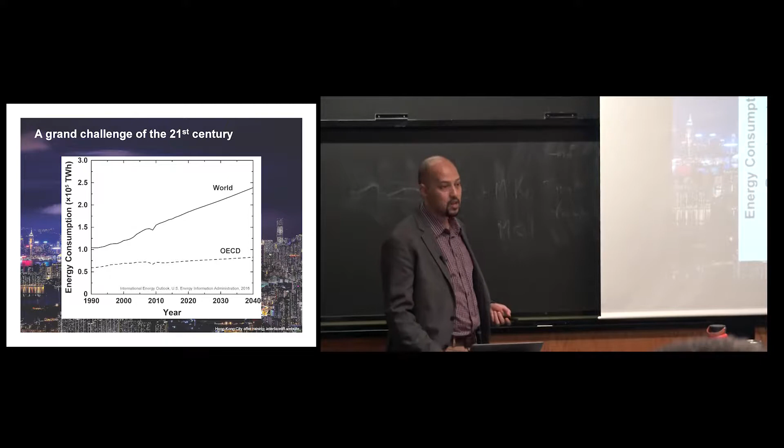The challenge is, of course, what this energy consumption is connected to. And the challenge is that with this increased energy consumption comes carbon emissions, right? And if we're intrinsically coupling energy consumption with carbon emissions, we start to run into problems related to climate change. And so the second graph I'll show you here is some emission scenarios that I pulled from the Global Carbon Project.

And this essentially looks at the idea of net CO2 emissions. This is where we are sort of tracking along here, this Keeling type curve, and trying to understand how these changes in net carbon emissions are going to impact either changes in the global temperature or changes in the radiative forcing target, right? So this is the difference between the amount of energy that comes in and the amount of energy that will come out of the global climate, and that's related then to heating. So the more the delta is, the more heating that you have.

And what you'll notice here is that the baseline approximation, so if we do a business as usual case, we're moving up, up, up, and there's some range in the models right here, but you're around 4 to 5 degrees or greater. And if we actually want to keep it down below 2 degrees Celsius, we actually need to figure out a way not just to stop increasing net emissions, but actually to reverse them and begin to go negative by almost 2080 here, right? So this is a fairly significant challenge.

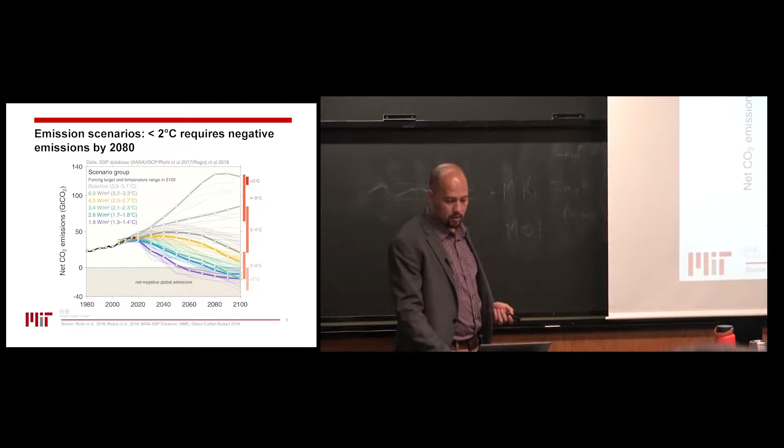And 2080 is not that long of a time scale in terms of making changes like this. And so we're at a point in time now where if we're going to act, we're going to have to act pretty quickly, and we're going to have to act pretty drastically. So we're already beginning to move forward.

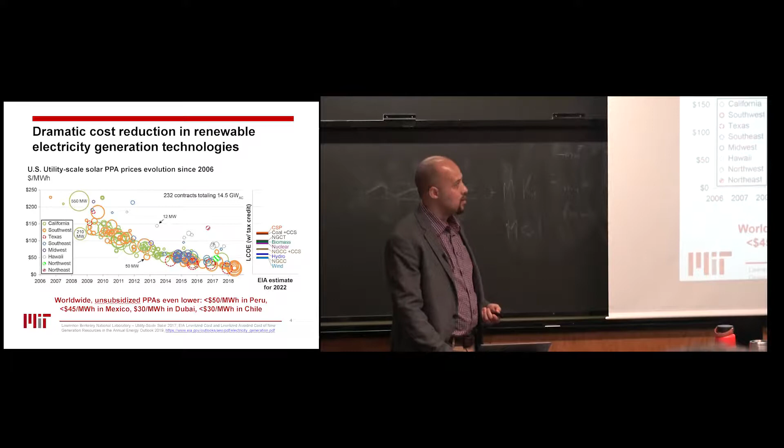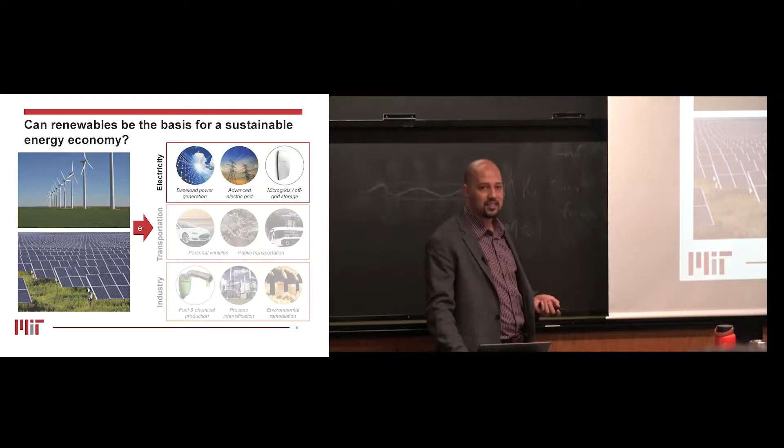And once you enable this, if you have green electrical energy, there's lots of very interesting things that can be done within industry. You can think about using electrical energy very simply to, say, power boilers to generate steam. But perhaps more interestingly, you can think about what electrochemistry can do in terms of imparting unique reactivities to maybe revolutionize the way we synthesize fuels and chemicals. I would love to talk about these, but as I understand, this class is a little bit less than an hour, and so I'm going to solely focus on the electricity side of things, but hope that people understand that the methods that I'll talk about are portable and can be applied to these other sectors.

So far we've talked a little bit about fossil generation and the integration of renewables into fossil generation and the coupling then between this generation and the demand that's coming from industry and coming from residential and society in general. So how do we typically store electricity now if I want to decouple that?

The size of the reservoir determines how much energy you store. So the larger the reservoir is, the more power I can deliver for a longer period of time. And then the size of the power station determines sort of the rated power that I can deliver, right? So you can imagine for longer duration energy storage, you're going to build a larger and larger reservoir or more reservoirs. You don't necessarily need to build a larger pump station.

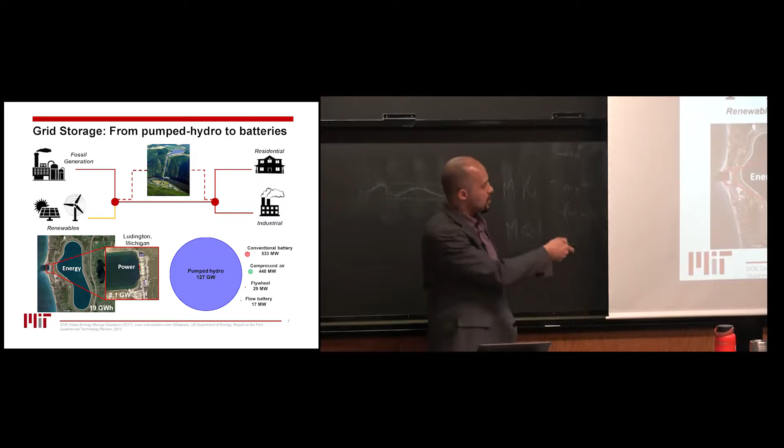As a result, the cost of this system begins to asymptotically approach the cost of storing the water in the reservoir, and the pump station becomes a smaller and smaller part of the cost as I go to longer and longer durations. And this is what leads to it being very cost effective for longer duration electricity storage.

The trouble, of course, is geological architectures, right? Here, you might be able to maybe do pumped hydro because you have the Finger Lakes and you could maybe have a reservoir on top of a hill. For me in downtown Boston, this is an absolute no-go, right? So we got to figure out a way to be able to store electricity without necessarily being limited by my geological formations. And so the way that we start to think about that is to use batteries and to say, well, can I think about using electrochemical energy storage to do something similar to pumped hydro?

And I want to mention here that most folks, I think, in this room are very familiar with batteries that look like this. Enclosed, could be a Duracell AA battery, could be a lithium-ion battery, where you have a compact form of energy storage that powers our portable electronics and is actually now emerging in things like automotive applications.

However, when I go to the grid, what I'm really concerned about is price and lifetime. My cost optimization is I need it to be as cheap as it possibly can, and it's going to be a big project, so in order for me to recoup my expenses, I need it to live for a very long period of time. Energy density is only an input that serves to enable price and lifetime, right?

And as a result, what that means is that I don't necessarily need to have an enclosed battery. I can have batteries that begin to look more like a chemical plant, where now I'm separating a reactor out and I have storage tanks and pumps and heat exchangers and all of that. And they're able to do that because I'm saying that my space constraints are no longer such a big deal. I can maybe get to cheaper systems if I get to these new designs. And that's what I'm going to talk about from here on out.

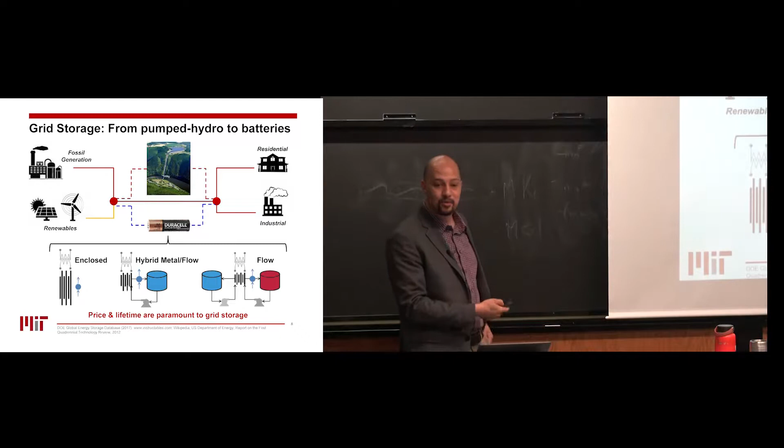So how many people here are familiar with redox flow batteries? Maybe show of hands. Okay, a few people. That's okay. There's no quiz.

So I'm going to go through some redox flow battery fundamentals, and I think this hopefully will be useful as we go forward to understand some of the points that I'm going to make later about the unique aspects of this architecture. So the redox flow battery consists of two tanks that store energy, that have energy storage or charge storage materials that are pumped through an electrochemical reactor to oxidize and reduce these materials to store and release electricity when we want it.

So within the tank, you're going to have three components generally. You're going to have an active species. This active species is what actually will convert the electrical energy into chemical energy through redox events. And you're going to have the active species dissolved in some supporting salt and solvent. So in this case, I'm showing you a vanadyl sulfate, and that's typically dissolved in something like sulfuric acid and water, right?

And what these systems will take advantage of is that there are different redox reactions that occur at different free energies. So they're occurring at different potentials. And the cell potential between these two redox reactions now tells me how much energy that I can store in my system, right? And so when I charge and discharge, I'm simply converting from electrical energy to chemical energy, and the cell potential is then related to the Gibbs free energy that I can store. So how much energy I can store in this particular form. And so I can charge and discharge to get my energy storage in and out of the battery.

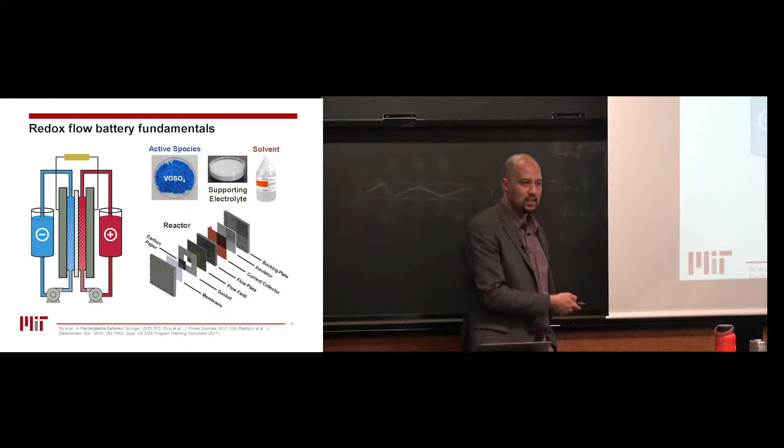So separations in flow batteries are usually a combination of charge selectivity and size selectivity as well. And we'll come back to that because it's something that we can use to our advantage. So how do I actually get towards the membrane? I need to introduce my liquid electrolytes from the tanks, and they're introduced through various flow fields. This is an example of an interdigitated flow field.

And if I look more closely at my porous media, it looks a little bit like a paper, a carbon paper right here, where I have relatively large pores that enable me to flux through there with relatively low pressure drop.

So my electrolyte is moving through here with forced convection, and then there's a diffusive flux to my electrode surface where my electrochemical reaction occurs, and I charge my system, and I move back out and move back into my tanks. So hopefully that made a little bit of sense right there.

And for those of you who are from an engineering background, what you can probably see here is I mentioned thermodynamics, I mentioned separations, I mentioned transport, and I mentioned kinetics. And you can also think that process design and estimation come into this as well. So this is an engineer's playground, in my opinion.

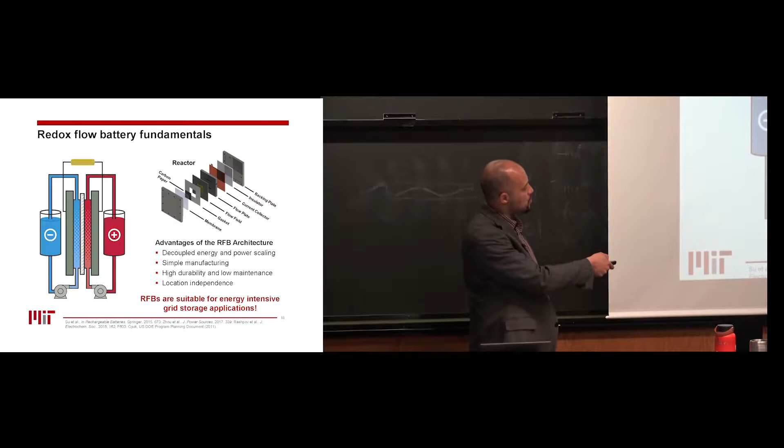And so the rub here is that I'm using redox flow batteries for grid storage applications where energy density isn't my main design factor, it's cost and lifetime. So this is just an example of a vanadium redox flow battery. This is present state of the art. So for example, if Cornell or anybody wanted to buy a redox flow battery, you'd probably be looking at vanadium redox flow battery vendors.

The way this system works is that you take advantage of the fact that vanadium has 4 stable redox states within the water window. And so you're able to oxidize vanadium 4 to 5 and reduce vanadium 3 to 2 to charge the battery. And then to discharge the battery, you take vanadium 2, oxidize it to vanadium 3, and reduce vanadium 5 to vanadium 4, right?

The nice thing about this particular system is that if I don't have a perfectly perm-selective membrane in the middle right here and my ions mix, it's all the same parent compound. And so periodically you can rebalance the tanks to get your system to operate for longer. So it's quite robust in that fashion. And because it's an aqueous electrolyte, there are a few less challenges in operating as compared to a non-aqueous type system.

The disadvantage is that vanadium is quite expensive. Vanadium right now actually has gone through a spike. Recently, the Chinese steel industry increased the quality of steel, which means they need to put more vanadium into steel. Steel is the main use of vanadium right now. Vanadium redox flow batteries, therefore, are price takers. They tell us how much it is, and we buy it at how much they say it is.

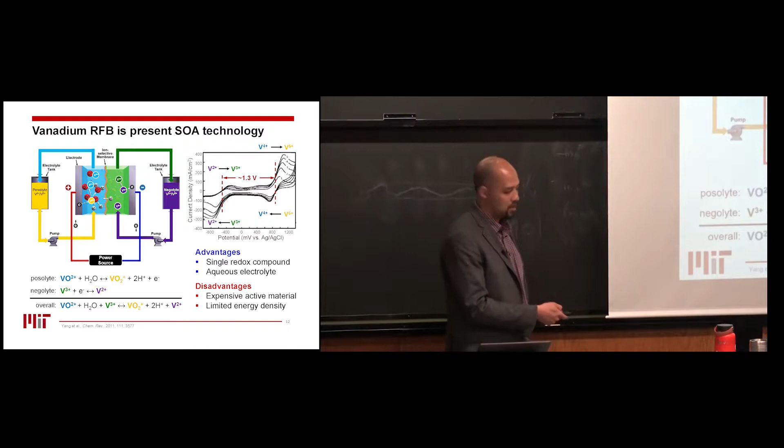So the value proposition of flow batteries is long duration. And I want to remind you of the graph that I showed you from Texas a few minutes ago, where I mentioned that we have to think about energy storage on multiple time scales, right? I said we have to think about it intraday, intra-week, intra-month, and maybe intra-year or seasonal. And what you can see is that as renewables penetration becomes greater and greater, we're going to become increasingly concerned about these fluctuations. And so we're going to need to think about what kind of energy storage devices are going to allow us to live in such an environment.

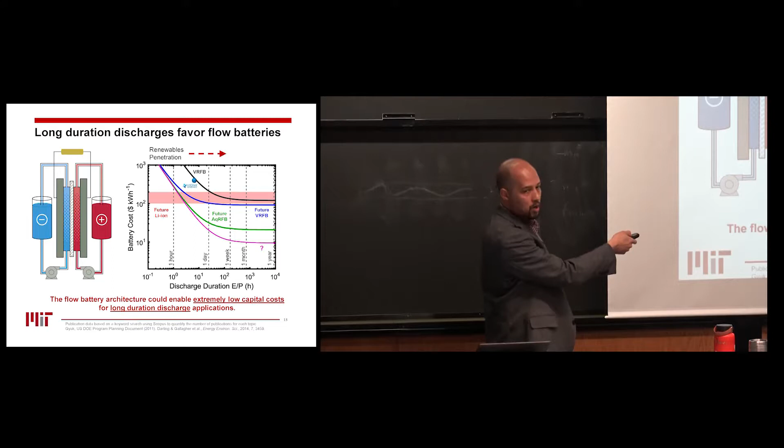Now, what would be interesting is, can you begin to identify also new redox materials that are dramatically cheaper than vanadium or have some benefits that might allow you to get to now these lower costs out here, that now will allow me to get to systems that are transformatively cheaper than where we think lithium ion can go, and maybe that gives us enough of a leg up. And so that's sort of where we're thinking about.

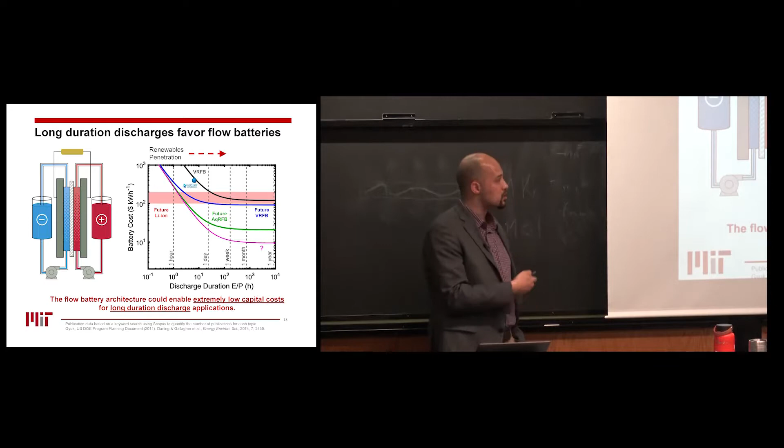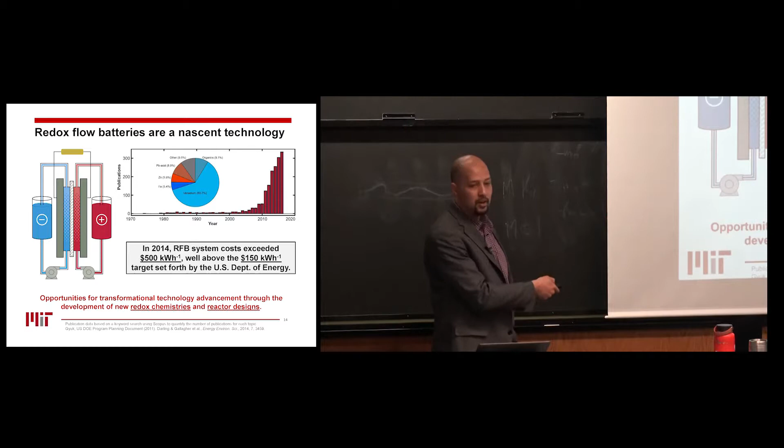The second is that if you go back to the previous slide that I showed you and I put the Vionx flow battery chemistry on there, in 2014, these costs are on the order of about $500 per kilowatt hour, and the DOE would like us to get to about $150 per kilowatt hour. So we're about threefold off at this point in time. So there's a need for innovation. There's a need to kind of close the gap here. And so what I see here is opportunities for transformational technology advancement through either the development of new redox chemistries or the advancement of reactor designs.

I'm not alone in this space. There are many different people who are quite interested in these types of technologies, and there are a range of pathways going forward. So if you went and looked up new research in vanadium redox flow batteries, you'll see that there's a tremendous effort to get away from things like vanadium to look at, say, organic or polymeric type active species. The reason you like organics or polymerics is that in terms of organics, that gives you some design flexibility in terms of controlling different aspects of your redox molecule. In terms of polymerics, you can then think about going from an ion exchange material to a size selective material that looks a little bit more like a filter.

And that way, if your polymerics are large enough, they're not going to go through that membrane. And these tend to be significantly cheaper than the ion exchange membrane. So going entirely to size selectivity.

As we start to look at these new materials, we want to also expand our design space. So we want to get away from aqueous acidic, where a lot of these types of organic materials aren't necessarily happy all the time. So can we think about going to neutral pH? Can we think about going to non-aqueous that might allow us to get to higher cell voltages? And this is an area of particular interest for me.

And then also, can we think about cell design? And so rather than taking cell designs that are borrowed from fuel cells, because those are our more advanced cousins, how do we think about then going to systems that are specifically designed for redox flow batteries, where we have a deeper understanding of the transport and the kinetic rates that go on in those systems, and then how one would design a battery around that? So there's work going on in all of these areas.

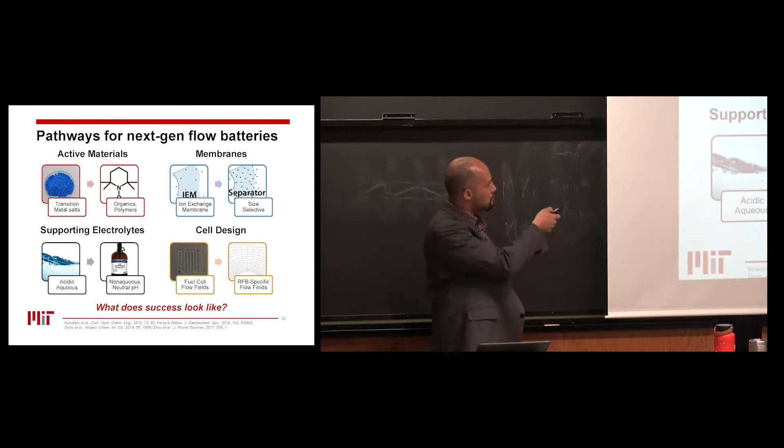And one of the things we started to think about was, what does success look like? So if we're all working hard in all of these different areas, how do we know that we're getting anywhere, right? So we could spend a lot of time designing new organic materials, but our limitations may turn into what kind of solvents we can use, what kind of membranes we can use. And so how do we think about the system as a whole and try to identify what favorable combinations of each of these areas would lead me to the lowest cost battery, rather than focusing solely on each one of these individually and trying to optimize them, or maximize them rather.

Remember, I started this talk saying we need to go beyond better batteries. Better batteries is something that we all agree upon, but it's not a tractable research direction. Like, what would you do, right? And we try to think about ways that we can use models to represent and help us to understand what is needed on a basic science side.

I want us to think about models very generally, though. So typically when you think about models, everybody might have their own idea. It could be a DFT model. It could be techno-economics. It could be some sort of mathematical description. But models are very general and should be viewed in the broadest sense. So it could be very well a techno-economic analysis, which is what I'll talk about almost immediately after this.

But I'm also going to give you examples of models where we can think about different reactor designs that can teach us something about transport or kinetics in the systems that we're interested in, or thinking about model redox couples that we can use with which to probe different performance aspects. So models should be thought of very generally rather than saying, oh, it's just on a computer or something like that. And so I'll start off with techno-economic modeling.

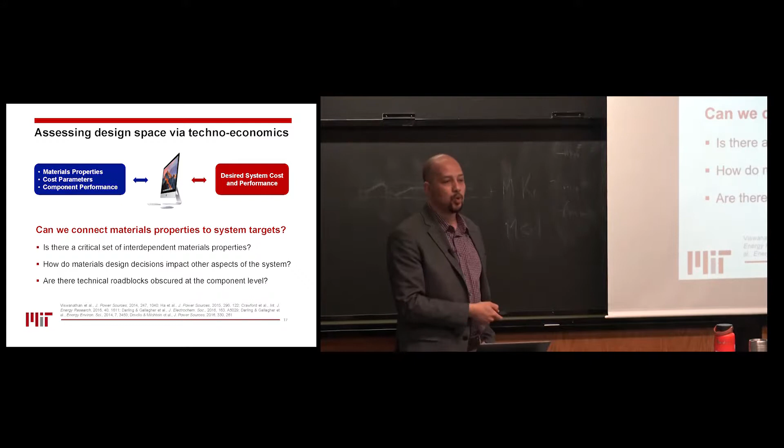For example, if I wanted to use a polymer, I can use a polymer in a flow battery that will allow me to get to a cheaper separator, but pumping a polymer is no joke. So have I actually gone forward, right? And then what technical roadblocks might be obscured on the component level, where I'm looking at one component and I'm missing something bigger in the system. And so that was the goal of this techno-economic analysis.

And so our approach has been to consider best case scenarios. So when we look at techno-economic models, we consider a future state where we have economies of scale, high volume production in a competitive market. This is an imperfect analogy, but you consider this to be the thermodynamic limit of cost, right? So if everything breaks in your favor, this is how low you think the cost can go. And if you can't hit your target when you get to that limit, you're probably never going to get there. But if you hit it, you have some sense this might be a good pathway to go down.

Because we're dealing with new systems, we use hybrid bottom-up and top-down approaches where we borrow from systems that we think are quite similar, but sometimes we need to build from the ground up. And then also, I'm an academic, but this is a very difficult thing to do alone as an academic. One very simple thing is I don't know how much things cost. I know how much I buy them at Sigma, but I don't think that's the real cost of materials. And so having industrial partners and folks at the National Lab really helps you to understand what is the true cost, or what are things that really keep them up at night, that allows us to get to a stronger model.

And so what I'm going to show you on the following slides will be a model that focuses on hitting a target that was set for us by JCESR. So this was the organization that I'm a part of. And what we're looking for here is to try to understand, for 5 hours of energy storage, how do I get a $100 per kilowatt hour battery, excluding the inverter and installation, that will operate for 7,000 cycles or 20-year life. If you run the numbers on this, this is about a cycle a day, so we're only looking at intraday type cycling.

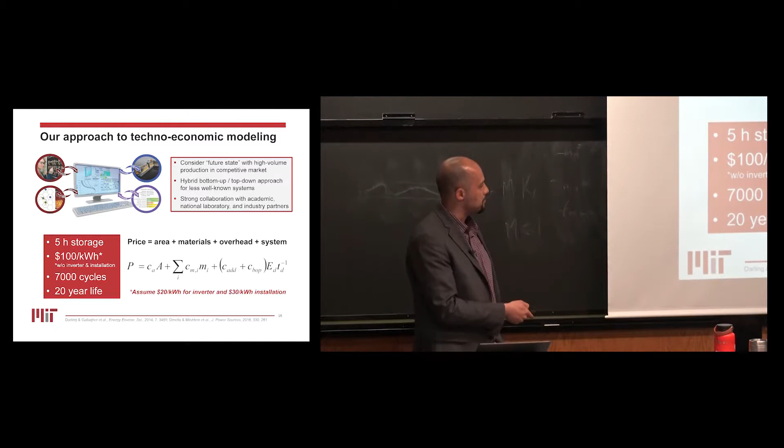So being a chemical engineer, the first thing I learned is I need to draw a control volume. And so if I draw a control volume around my flow battery, I basically want to say everything within this box has to hit $100 per kilowatt hour. So this is my price divided by my energy storage. And I'm going to have to pay for a reactor, so the cost of the reactor needs to go in there. The cost of the electrolyte, the salt, solvent, and active species, the tanks that you actually need.

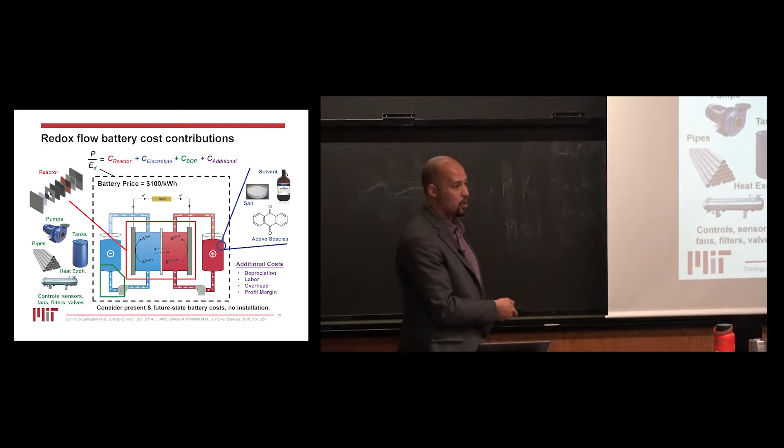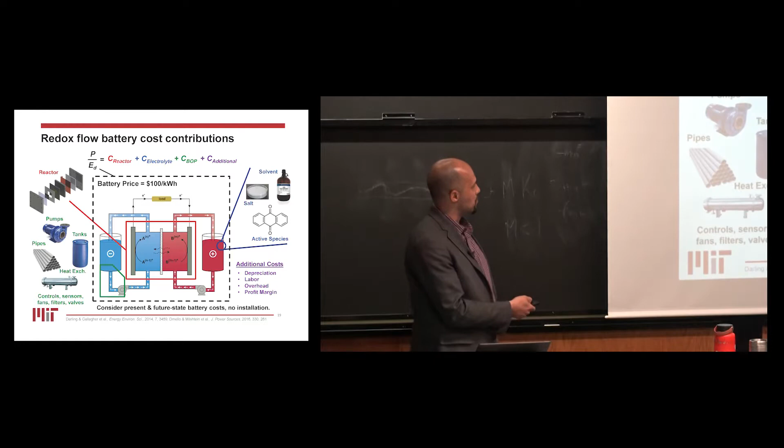Balance of plant, which is tanks, pumps, pipes, heat exchangers, the whole kit and caboodle, which is all the other stuff that you need for the battery to work but doesn't actually store energy. And then if I want it to be a price, I need additional costs. So this is depreciation, labor, overhead, and a profit margin, which is what makes it a price. And I'm going to consider here the present and future state battery costs with no installation, as I talked about earlier, and no inverter.

And so if I break down now the cost of the reactor a little bit more, the cost of the reactor is directly proportional to the cost of the materials that will go into the reactor. That should make sense. If I put more expensive materials in there, that's going to affect the cost.

And the resistance of the reactor is going to be directly proportional to the cost. So the higher resistance that I have, the bigger the reactor I'm going to need in order for me to meet my power target without losing efficiency, right? So if I have a lower resistance reactor, it can be smaller. And it's going to be inversely proportional to the square of potential.

What this tells you is that potential is a huge factor, and potential here is my cell voltage. So the higher cell voltage that I have, my reactor is going to become increasingly cheaper. So this is a really big knob for us to begin to play with.

I mentioned to you cost earlier, and I said I don't really know how much things cost. I know how much I pay Sigma for them. The cost here is a difficult thing to figure out. But we're fortunate in that flow battery reactors look a whole lot like fuel cells, and so I'm able to take advantage of what the DOE has done in terms of PEM fuel cells and take these numbers and figure out where they're going to go in the future. So this is a benefit of having a more advanced cousin.

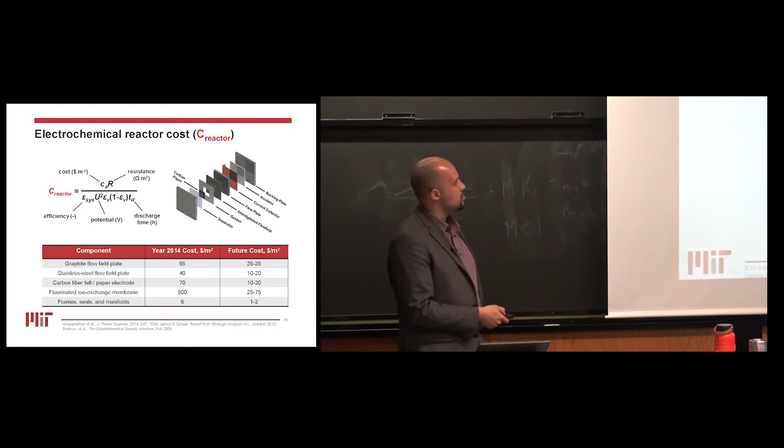Then I want to think about my electrolyte cost contributions. My electrolyte cost contributions can be normalized by my discharge energy. So this is how much electrolyte I need for a 5-hour discharge. And it's going to be made up of my active materials. I need both a positive and a negative active material. It's going to be made up of my salt, a supporting salt that's required for my system to operate. And it's going to be made up of a solvent, right? So what is everything dissolved into?

If I take, for example, an aqueous battery, say vanadium, the cost of sulfuric acid and water is significantly lower than the cost of vanadium. So these terms are going to be minor contributions, and your major cost contribution is going to be the active material vanadium, which is what's driving us towards inexpensive materials such as an anthraquinone, which I'll come back to, which may allow us to get to significantly lower costs.

The other way we can get there is we can go non-aqueous, and non-aqueous would allow us to get to this higher cell voltage right here. If I think non-aqueous, think about a lithium-ion battery versus a Duracell battery, where the Duracell battery is about 1.5 volts and the lithium-ion battery is about 4 volts or so. So that's a pretty big jump.

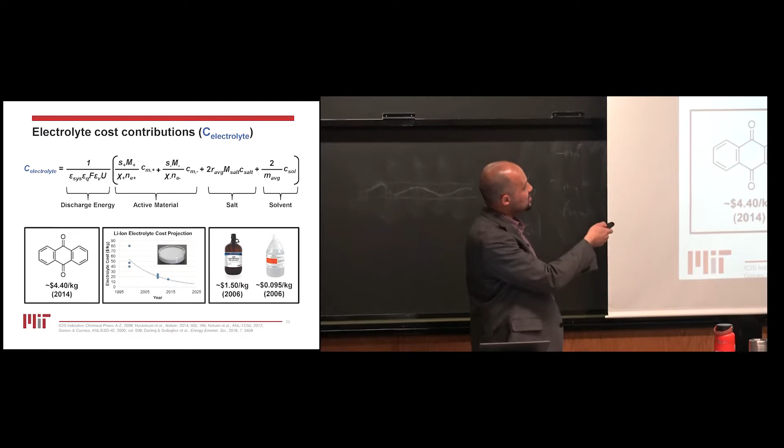The rub is that while my active materials might be cheaper, I could maybe still use some organics, I have to pay for the lithium-ion salt, which is quite expensive. It's typically fluorinated. And I'm going to have to pay an appreciable amount for my solvent. It could be something like propylene carbonate or acetonitrile, which are used on the large scale industrially now, so they might not be that expensive, but it's not as cheap as water. So I need to make sure that I offset these additional costs with the fact that I'm going to higher cell voltage. So that's the game we're playing here.

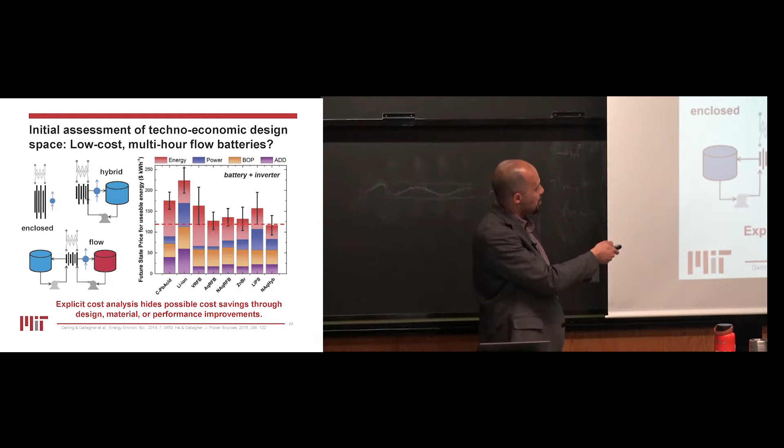I've basically shown you a bunch of stacks here where I have an add-up of energy cost, power cost, balance of plant, and additions to price. But what's hidden here in this is the analysis as to where cost savings could be. So where do we go from here? And how can I think about how different materials, designs, different performance, and different improvements can impact what's going on?

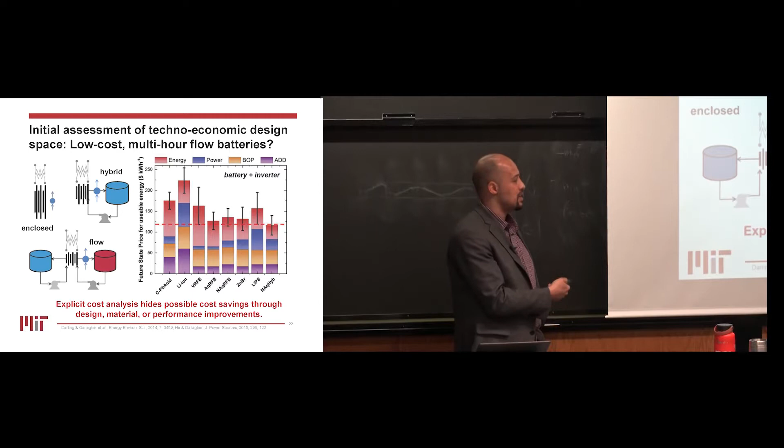So for that, we turn to a little bit more of a detailed model. And this is an explicit design map that we can develop using the same model that I showed you to basically break down where cost savings can exist. So what I'm going to show you here is cell voltage on the y-axis and area-specific resistance on the x-axis. Remember, area-specific resistance is directly proportional to reactor cost, and cell voltage appears in reactor cost in terms of power as well as in terms of the electrolyte.

And what I'll show you here is contours of iso-concentration in the form of molality, right? So this is moles per kilogram. What I'm showing you here is a viable region for non-aqueous redox flow batteries where you can see that if I have a particularly resistive reactor, it's very difficult for me to get into my design space, but as my reactor becomes increasingly less resistive, at some point in time, I don't need to get any better, and now all of a sudden most of my costs are associated with the cost of my electrolyte.

And you can see, for example, cell voltage. As I get to higher cell voltages, my required active species become lower and lower. This is again because I have increasingly energy content in there, and I don't need such a high active species concentration to offset my inactive components.

And you can look at these types of analyses then again for something like an aqueous system, where you can see different sensitivities appear. With aqueous systems, I have a lower sensitivity to area-specific resistance because these are so conductive, they work well enough already. And you can also see that I have a lower sensitivity to concentration. And this is because, again, sulfuric acid and water are so cheap, right?

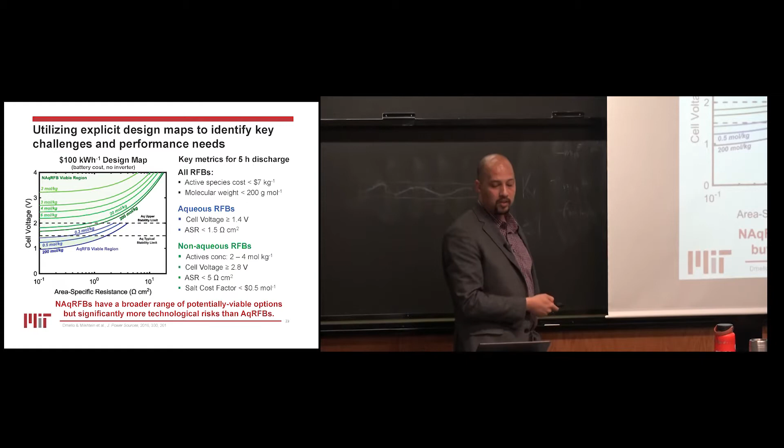And depending upon how much sulfur you have, it's either sour, which is a lot of sulfur, or it's sweet, which is not a lot of sulfur. The tar sands are particularly sour, and as a result, we build pyramids made out of sulfur, right? Some of the sulfur goes into things like sulfuric acid and other types of streams, but largely speaking, we don't have that much to do with it.

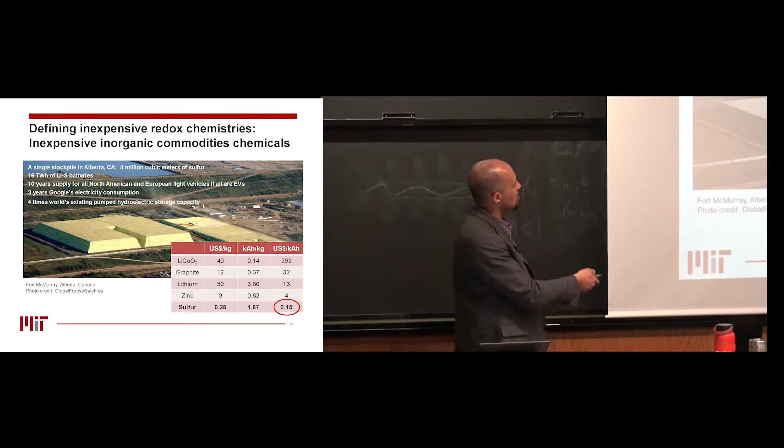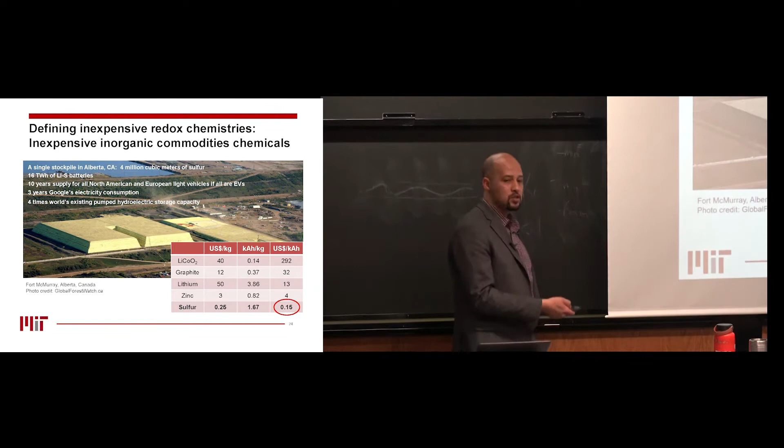But you can imagine now what you could do in terms of sulfur as an energy storage material. This is what's driving a lot of work in lithium sulfur batteries, but you can also imagine using sulfur for energy storage in terms of redox flow, alkaline polysulfide. You can also think about defining inexpensive redox chemistries using targeted organic molecules, right? So can we use tweaks of organic chemistry to tailor organic molecules that can be relatively cheap and give me high performance?

As a chemical engineer, it means that I'm an okay chemist. So a lot of this stuff, I can do some of it, but in this case, I have a lot of strong chemistry partners from a range of different institutions, and of course a chemical engineer as well, who help us begin to move through this design space and understand what we can do with tweaks of organic chemistry.

But maybe to convince you that a lot of these materials can be cheap, I'll give you an example. So this is an example of anthraquinone disulfonic acid, right? AQDS. And basically the way you form this is you have crude tar coming out of the ground, again, coming from petrochemicals. You can separate out anthracene. You can take that anthracene and oxidize it to form anthraquinone. We actually do this right now. This is a catalyst that we then use to make hydrogen peroxide, right? And so with one more step of sulfonation, you can take this perhaps to a redox active material.

And so you can imagine taking anthracene, designing a simple plant process around it, so this is something coming out of Aspen, and I can figure out how my costs will come down as a function of my production volume, where at low production volumes, the capital cost is dominating, but as you get to higher and higher production volumes, now we get towards the operating cost, right? And you can see that for my target of, say, $5 per kilogram, I can bring the cost all the way down of these organic materials.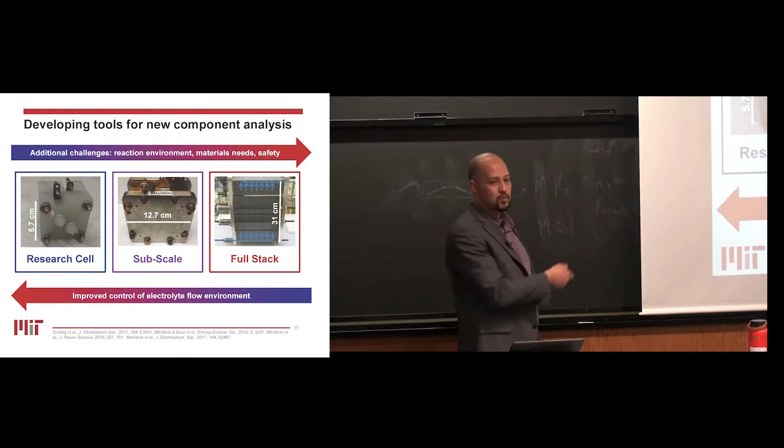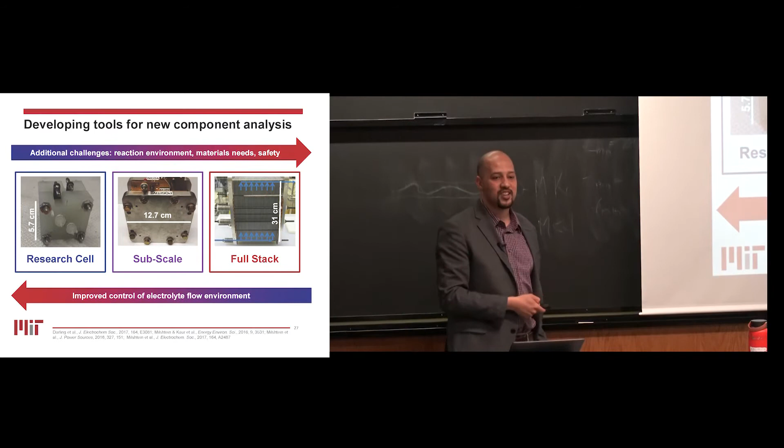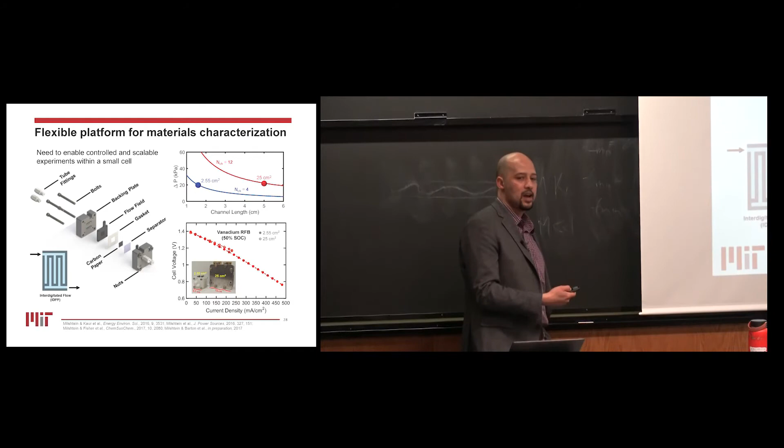So for example, if Professor Archer gives me some polymer, I can't take that polymer and test it in a subscale cell. It's going to require way too much polymer, and then I'm going to come back and tell him that I want to do repeats, and we're not going to be friends anymore. So I want to think a little bit about research cells, right? Small scale cells where I can do rapid characterization. We spent quite a lot of time thinking about these as flexible platforms with which to understand how to design materials and to rapidly characterize, and fail fast, hopefully quickly, and get to the right types of materials.

We've also thought a lot about leveraging flow cells as analytical platforms. This is an example of a full cell test where, for example, if I wanted to do a new active material A here, in order for me to test it in a full flow battery, I'm going to need to have a separator and I'm going to need to have a counter electrode material. And so what I do is charge and discharge this material in a dynamic sense and wait for it to fail.

But if the battery fails, whose fault is it? Is it your new material? Is it the membrane? Is it the other material? It's very difficult to deconvolute these types of challenges. And so then how do you go towards a better analytical platform? Say, for example, a series of do-nothing machines, where here I have now my material A at 50% state of charge.

And all I do is I run it through one side of the cell, oxidize it, loop it back on the other side, and reduce it. And what that allows me to do is steady state cell polarization with a single material, so I can understand where resistive losses are coming from in my system and back out what kind of design specs I would need for a reactor.

If I wanted to see how long A would live, I can then cycle it in another do-nothing machine. This is a symmetric cell, and what I'm doing here with the symmetric cell is I'm charging and discharging and throwing an ion back and forth across the separator, so I'm essentially flipping back and forth around 0 volts. This allows me to charge and discharge and see how these materials decay, and that way I can figure out the decay of one particular material rather than having everything convoluted together.

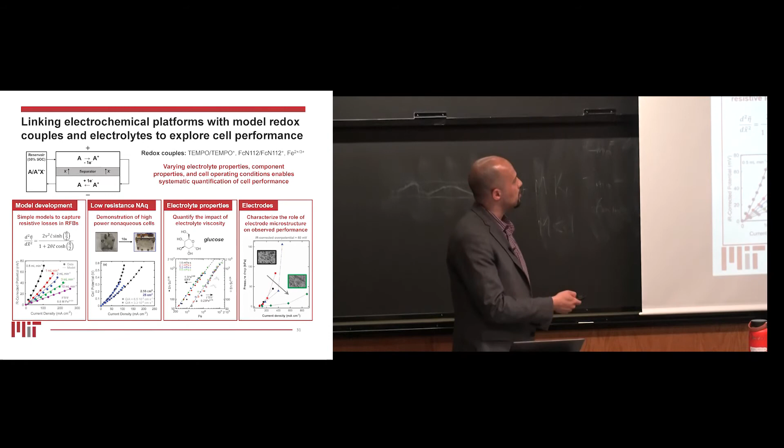I'm going to finish here very quickly with 3 grand challenges for the people who are in the room and also the people who might be watching this later. I think one of the biggest challenges is going to be guided synthesis of new materials with precise properties. So I told you that we have all of organic chemistry at our fingertips. We can think about designing new materials that can get us to the performance that we want.

But it's a big difference between knowing that you can do that and actually being able to do it and to do it effectively. And so what tools can we think about using, things like quantitative structure property relationships and genomic approaches, to begin to understand how do we accelerate invention or discovery of new materials, and how do we know that these are universal, right? So we need to get to new materials faster and better, in a more effective way.

The second is, can we think about the way we actually put these systems together? So I spent most of my time talking about monomers or small units that would line up with anion exchange membranes. What happens if we go to oligomers, polymers, or colloids? This will allow me to then get to cheaper membranes, but I need to worry a little bit more about transport, right? And I need to worry a little bit more about kinetics.

That was what I thought about. And nobody called me on it yet and said, yeah, 20 years, are you sure about that? You want to bet money that it's going to last 20 years or so? And that comes into a warranty. If I sell you a flow battery and I say it lasts 20 years, I'm going to have to give you a warranty. So when it doesn't, I come and replace it, right?